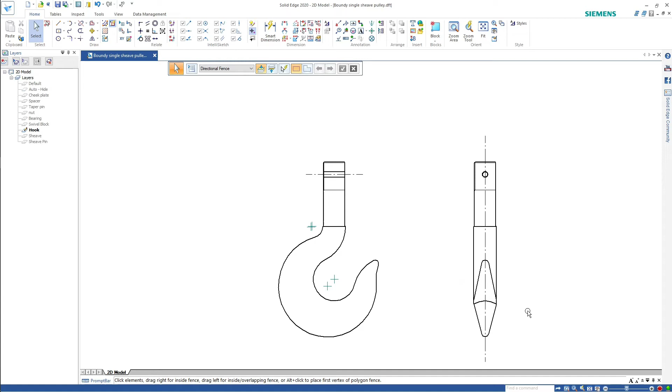The crane hook in section is not as easy to draw as you think because its section constantly changes. If I take a section straight down here, I'm only getting that one section from there to there. But how do I draw this bit?

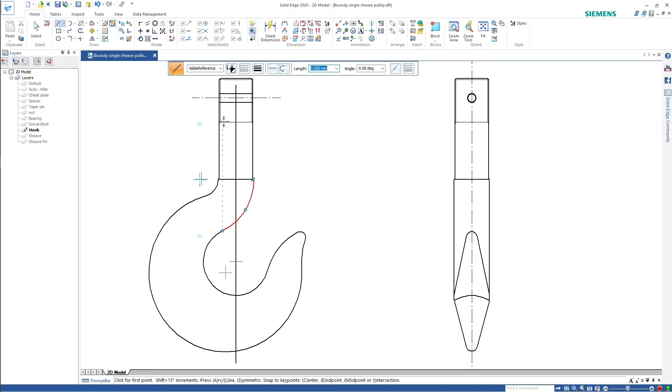That's circular, that's a bolt. The bolt is not sectioned. Down here it's a circular shaft with symmetry, it's not sectioned. Here it's not symmetrical, it should be sectioned. This is where the standards fall into a grey area.

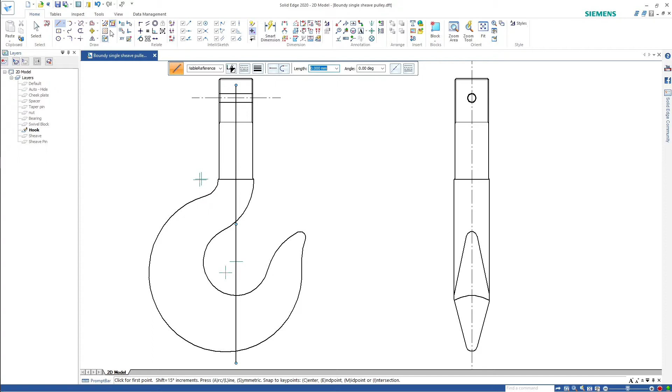I'm going to show you how it's done quickly. It's not done by sectioning this drawing as I've just shown you. It's done by what they call interposed, or rotated, or removed sections.

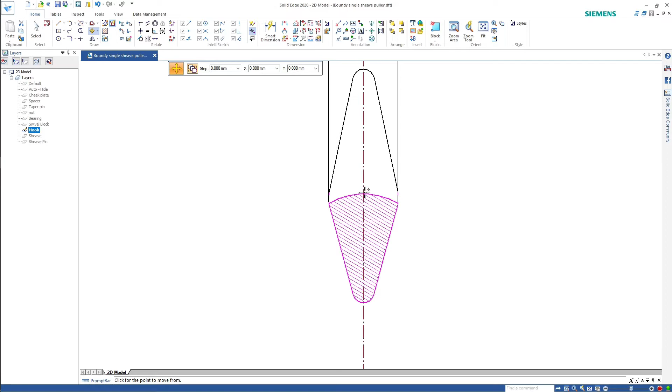So I'm going to copy that from the top, straight down around to here. So essentially that's showing that in cross section at that point. That's an interposed section.

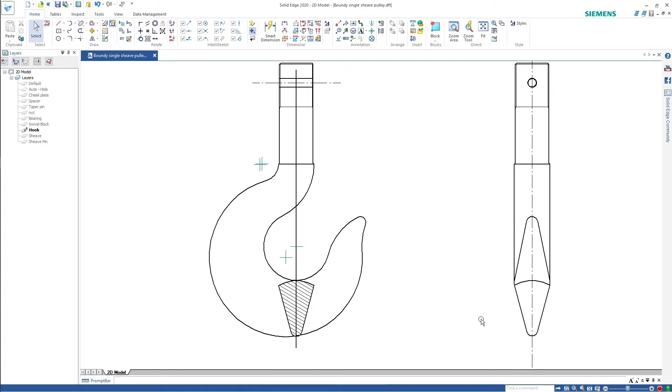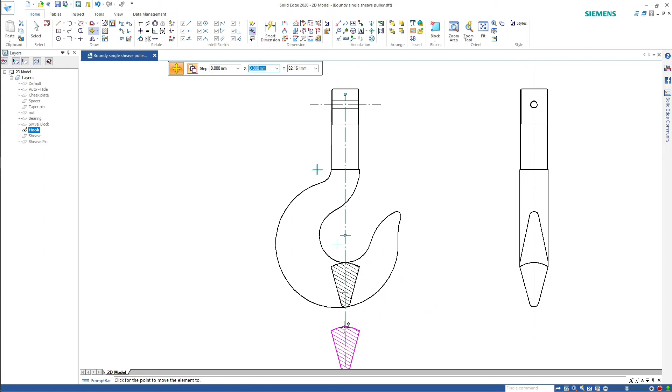You might, and let's do it this way, a removed section. Let's extend this centre line down. That is a removed section.

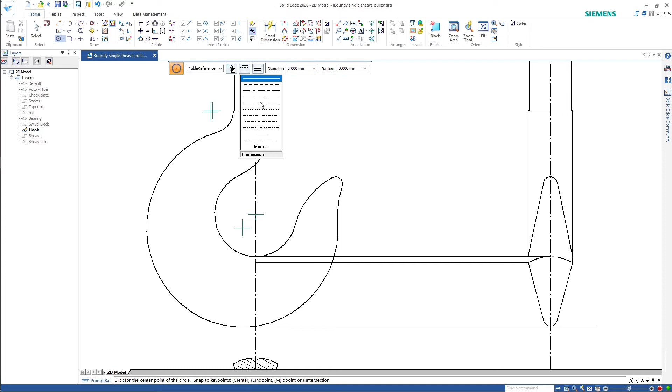Let's now have a look at it out here. We know it's a constant radius 38. So that's where the outside of the hook is. Well, that's that high point of the chain hook as it's going round.

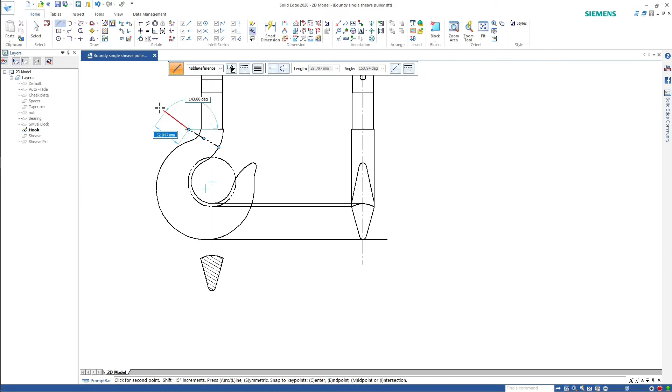Up here, on this point, let's insert our sectional view from there to there. So there's our removed section.

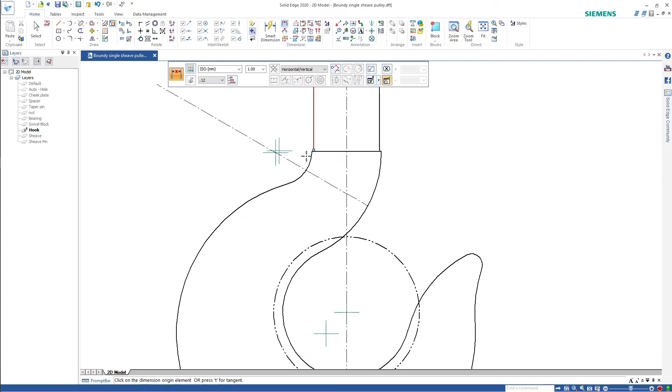From here, we know the width, we can see it there, is 38mm. But I need to know this particular dimension from that intersection point to this intersection point. And I want it, please, by 2 points. 38.78mm.

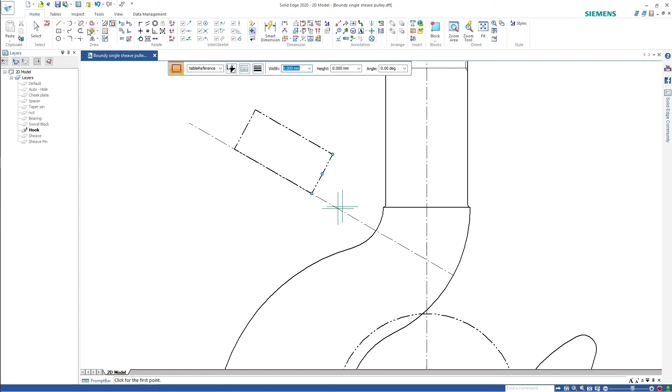Let's just mirror these three around. So we know that there was a blended 38. Here it's 38mm round. There it's essentially still 38mm round, just starting to go a little bit more oval there.

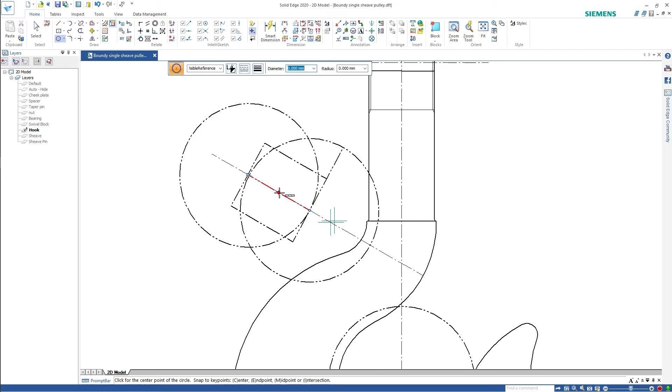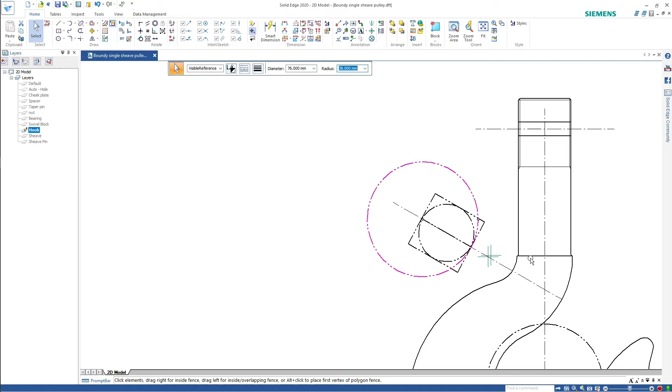So let's just draw in the circle first, 38mm. I'll remove this to avoid some of the confusion. That's where we're trying to blend it into, that line. So at this point it looks like that on the face. Up the top it's circular and 38mm. So here in between, we're sort of a shape halfway between them.

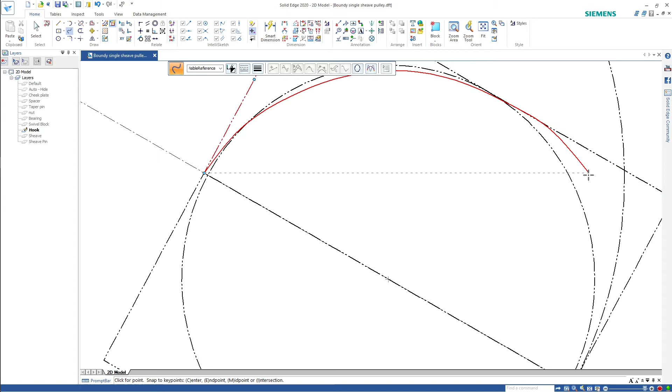And only draw half of it. Then let's see where we end up. So it's essentially going to be blending out here somewhere. Done. So essentially it's that line I've drawn there.

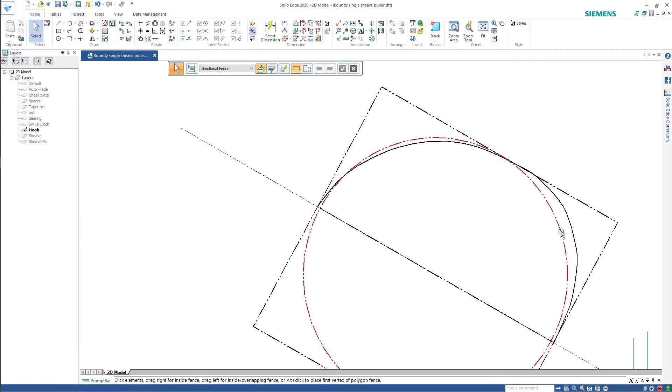And if anybody wanted to challenge that, that's not an accurate profile - these things are forged and hit into shape with a hammer. That is perfectly okay. So that will be about its approximate shape at this point.

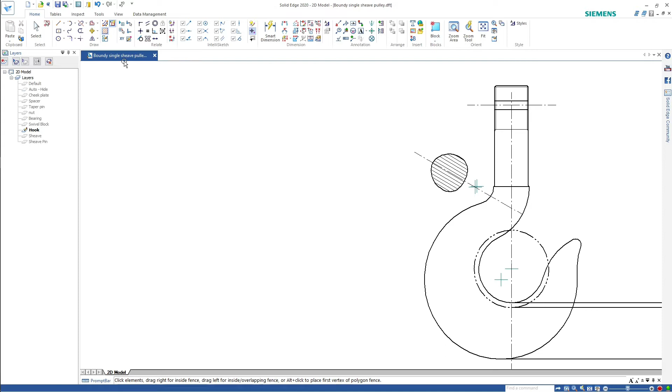Let's just mirror that, and there's its cross section there. We'll put in two more. I'll just continue this in a line. We'll just take a circular impression off that. Done.

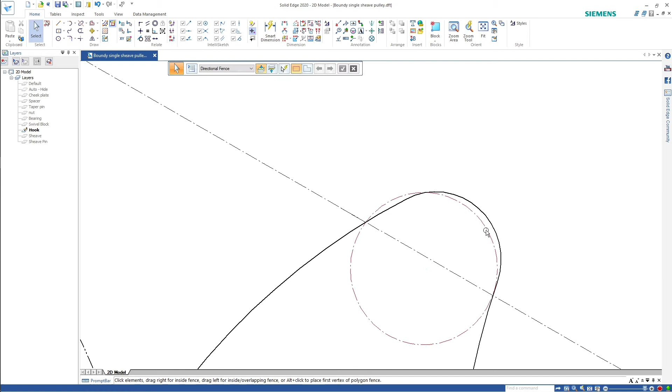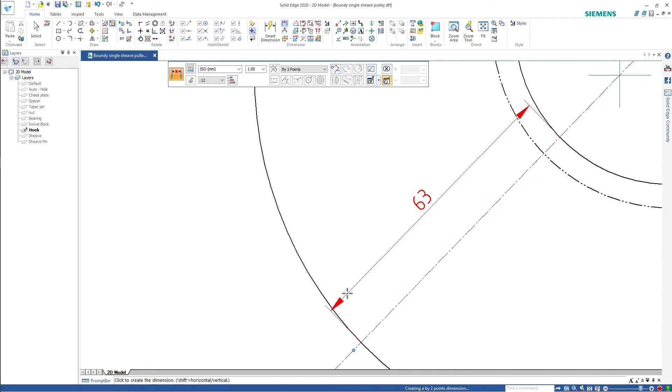Tip is circular at this point, like so. I need to know that distance from the inside of the hook to here: 63 mil. Okay, let's just draw it out here.

I've got a radius 38, double 38 is 76, like so. I'll remove that one now. That was only being used to find the center line, or just find the center of the circle.

So that's the shape of the crane hook at the very top. That is 19 out and 38 back. Done.

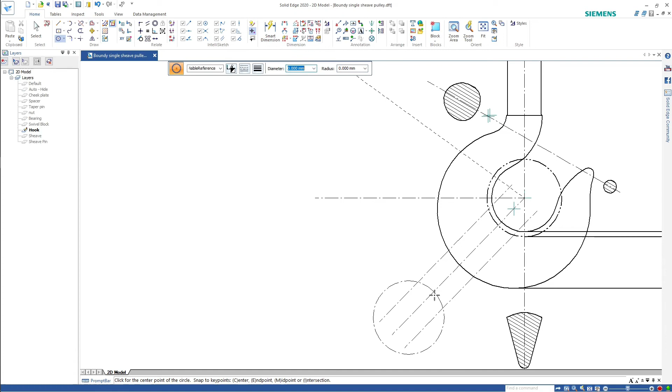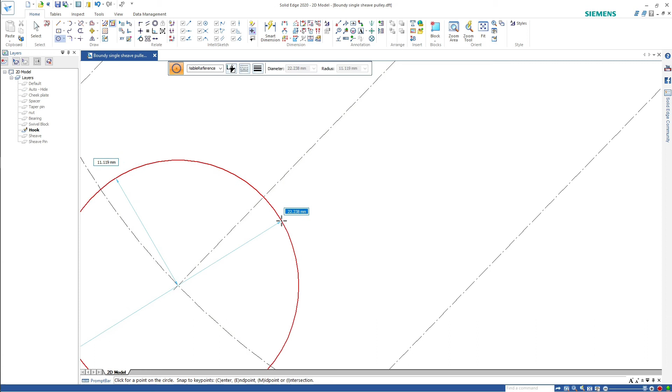And here on the end, I need a radius 6 mil circle as per the instructions. So there we go. So there's our 6 mil circle drawn in.

And now we just need to draw a tangent from here to that circle, tangency from here to there, and that's a tangent.

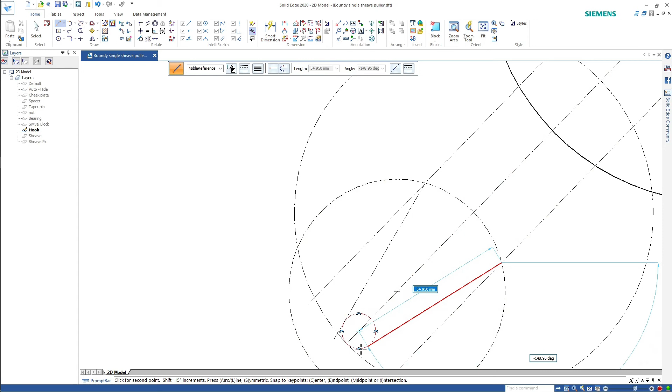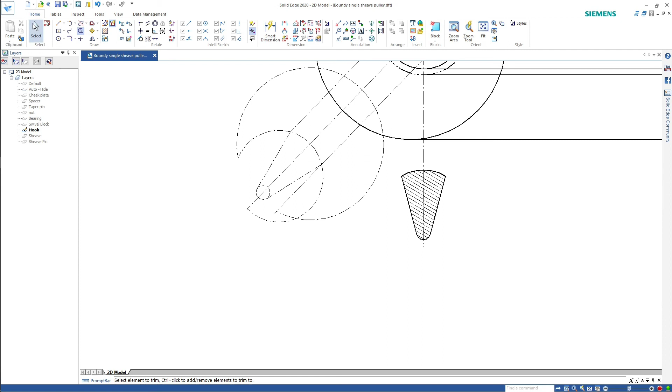And let's just trim up what we don't need, which at the moment is all of that. I'll feed that center mark out just a bit while I can, and then I'll just remove all the lines. I better leave that one and just trim that one back first.

There is section 2. Here is section 3, just repeating exactly the same process.

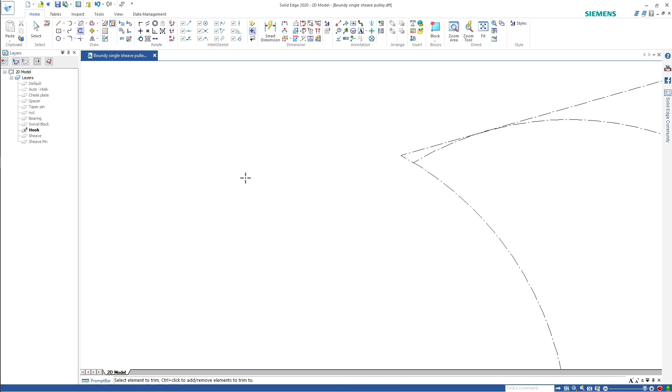Select them all. They're solid and they are hatched. Okay, done. That's indicating the section on the crane hook. It's a difficult one. I'm going to leave that there when I do the sectional view, and that is how I'm going to mark the section.

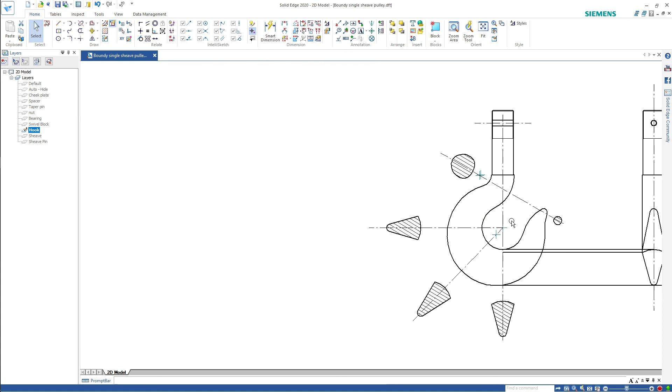So there's our crane hook sectioned.